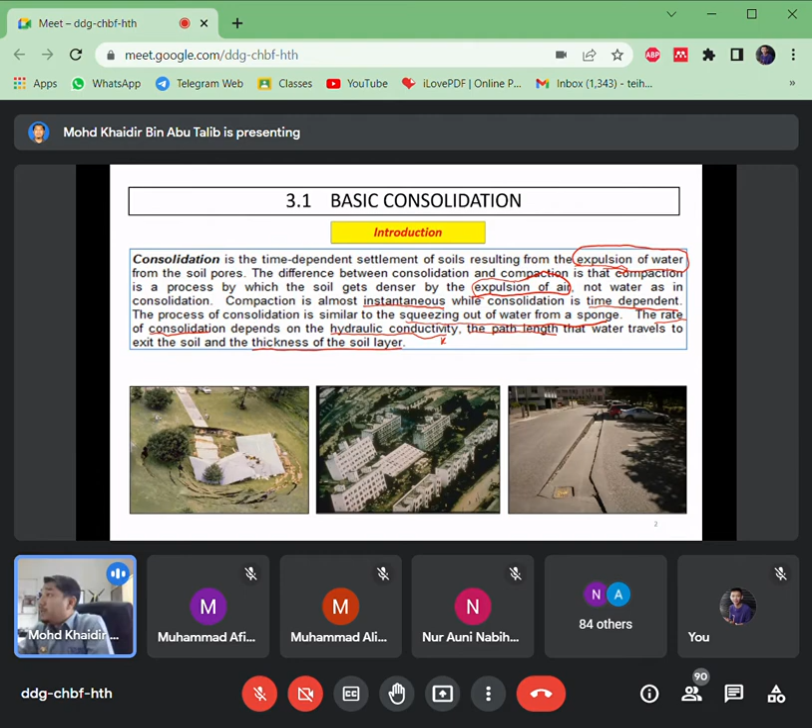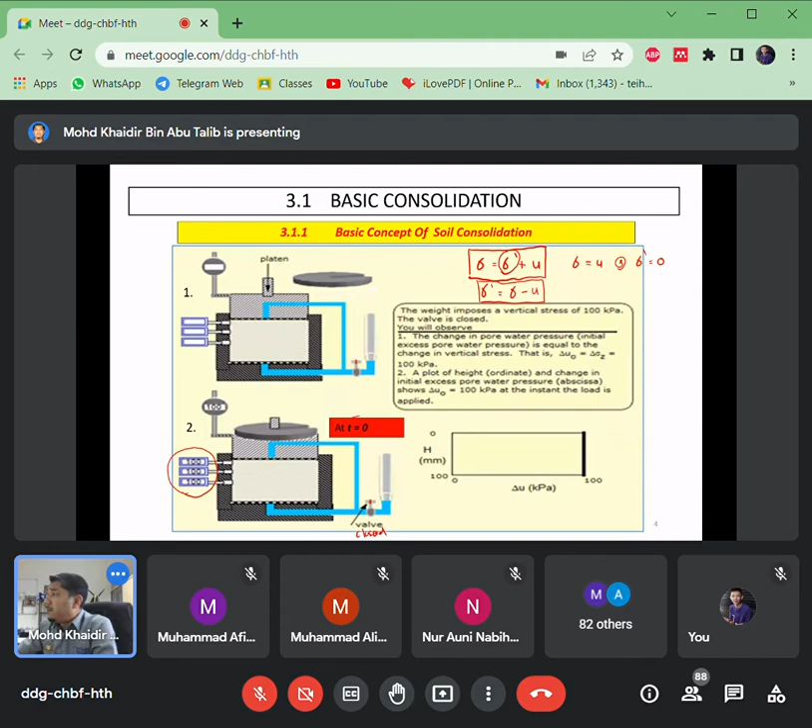Then we open the valve. Once the valve is open, let's say at T equal to 240 minutes, at certain times the water pressure would change due to the expulsion of water. So once it's open, water starts to be released and drains out. At that time the reading of the water pressure would be smaller than our vertical stress. Earlier at T equal to 0, U equals the vertical stress.

Kilopascal, which we get from the transducer at the middle of the clay layer. So going back to the formula: total effective stress equals total stress minus U. Therefore the effective stress equals 100, this being the vertical stress, minus U which is 54, giving us an effective stress equal to 46 kilopascal.

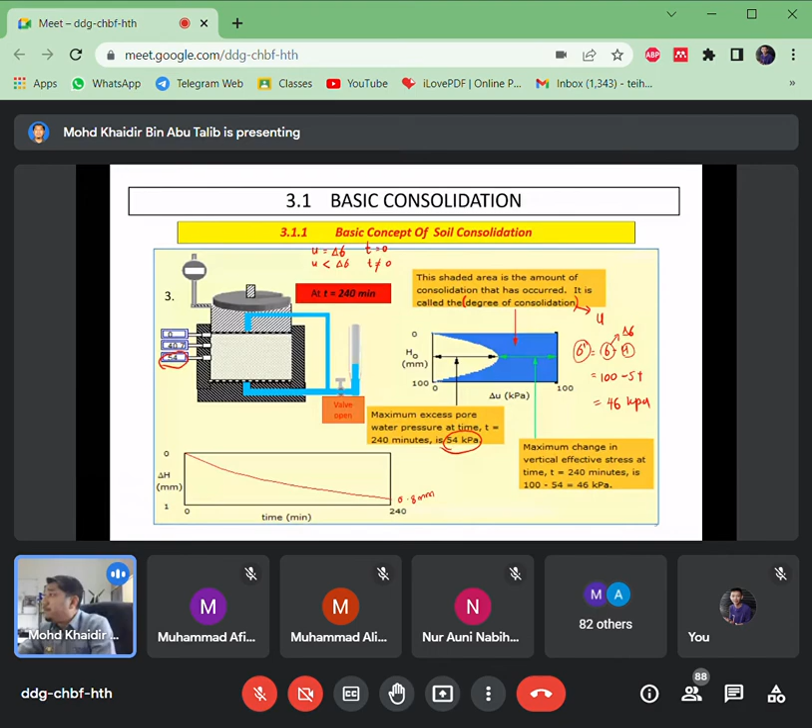So let's go back to this graph, which shows the change of thickness of the layer over time. As water comes out, settlement occurs. In this case it's about 0.8 mm after 240 minutes, or about 4 hours. So after 4 hours, the settlement is 0.8 mm, and the effective stress equals 46 kilopascal.

Okay, now we go to T equal to infinity. Infinity means when the pore water pressure is totally drained out — it's finished, the water is expelled. So at T equal to infinity, U equals 0. Once U equals 0, the effective stress equals the total stress, equal to 100 kilopascal.

So basically what we can see is the more it consolidates, the stronger the soil becomes. Now, as an engineer, the important part is whether the settlement is allowable in our design, and the next question is how long it will take for the settlement to occur for the allowable design settlement. If we know that, we can decide whether we need to improve the soil or find any solutions if that area has a problem — like in your project, once there's a problem, we move to solutions. If there's no problem, okay, no problem. But we need to know the time, the total settlement, and so on.

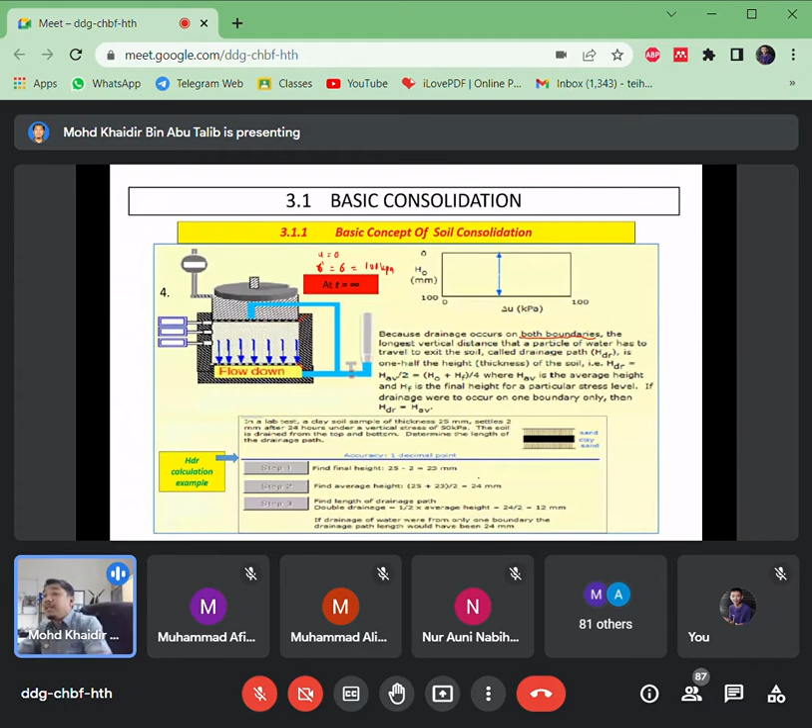This is a summary of the observations for the application of load at the valve close: T equal to 0, and valve is closed. U equal to the total stress, meaning 100 kilopascal.

At constant load with the valve open and T larger than 0, T cannot be negative, so T not 0 is in the positive integer line. The initial excess pore water pressure decreases and the vertical effective stress increases. So what happens is...

U by T will be smaller than the initial pore water pressure. Initially the pore pressure is 100, so by time it will decrease, and at this time the effective stress will have a value larger than zero, not zero. So effective stress equal to zero initially. When time approaches infinity, meaning all the water is drained out, the effective stress equals the total stress.

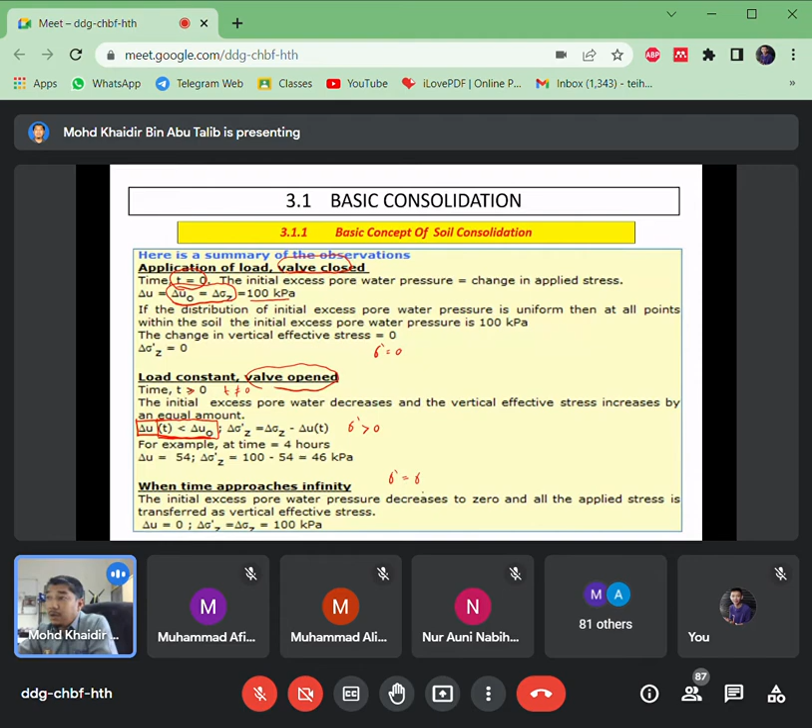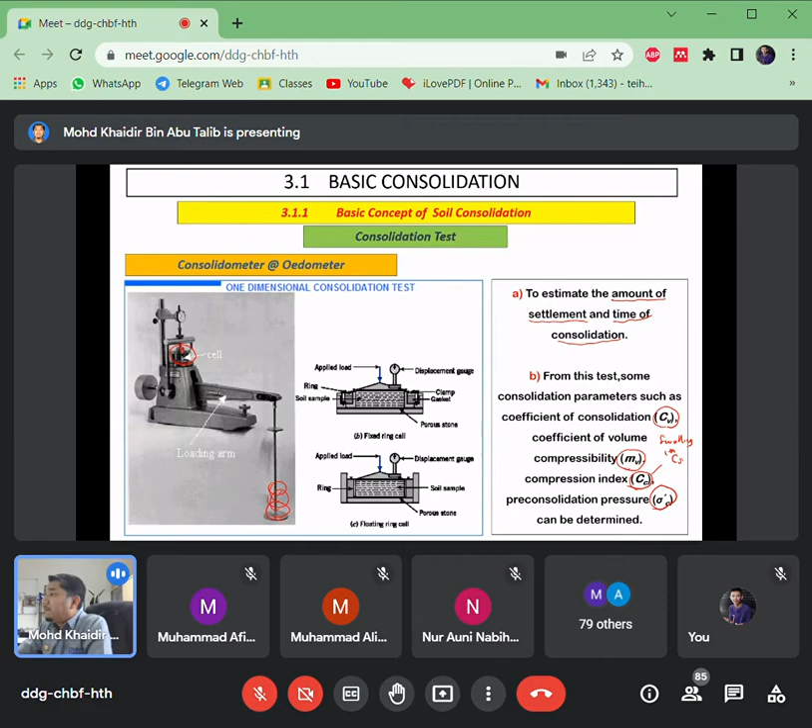At the regular time intervals, we need intervals of time. We can't just put any random time, sometimes a day, sometimes 2 days, 3 hours. It has its own timing, depending on the type of soil. Normally we take 24 hours, every 24 hours as one day. But for certain clays we can wait for each load about 2 to 3 days. 48 hours means 2 days. So some are 3 days, some are 4 days, some just 12 hours if the K value is large. So it depends.

The load is doubled with each increment up to the required maximum. So load is doubled means, let's say we start with 25 kilopascal, then 25 times 2 is 50, 50 times 2 is 100, 100 times 2 is 200. That means double of each increment.

The startup load is quite important. Why we choose 25, why we choose 20, why we choose 15. Similar to the time interval, it depends on the type of soil.

And during each load stage, thickness changes are recorded against time. So we have a table for this. By time, let's say in 24 hours we make certain intervals at 3 seconds, 6 seconds, 9 seconds, then 1 minute, 15 minutes, 1 hour, 5 hours, 12 hours and 24 hours, for example.

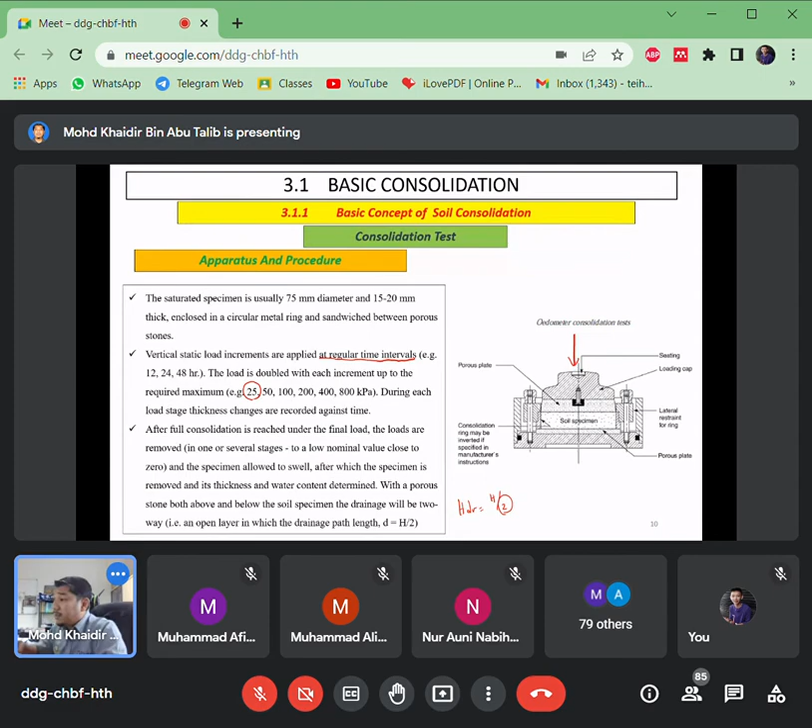In consolidation test, we have 3 main stages: stage 1 is initial compression, stage 2 is primary consolidation, and the third one is secondary consolidation. In many cases for clay, the more significant stage for consolidation is stage 2.

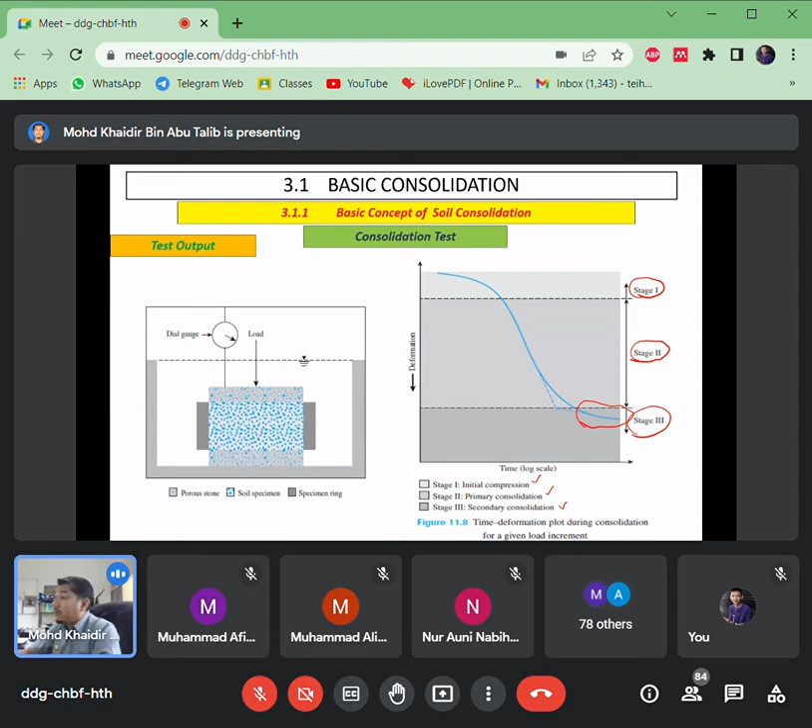So for the void ratio versus pressure. This is the first part to understand the consolidation process. Once we've done the lab and gotten the data, we want to analyze the data. So this is how we analyze the data. The first part we have to analyze is the void ratio-pressure plot, void ratio E versus pressure. Pressure is stress.

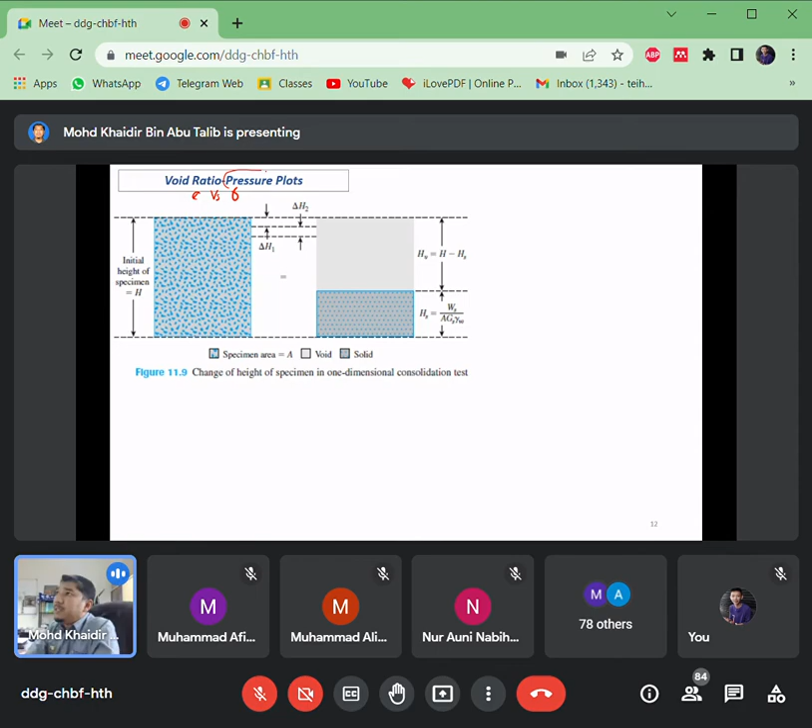Pressure plots should be in log scale. So E versus log sigma. Jadi ni.

This is the first part, the consolidation analysis. Let's say we have the initial height of specimen like this. Then after the change, or after we put the load - the first load, the second load - the change of the height, delta H1, the second load delta H2, the third load, and so on.

So the important part at the end of the settlement process or consolidation process, we have to know the solid height, the remain of the solid. So the void height is equal to the total height, initial height, minus the solid height, where the solid height equal to the weight of the soil divided by the area of the soil and the specific gravity of the soil and the unit weight of water.

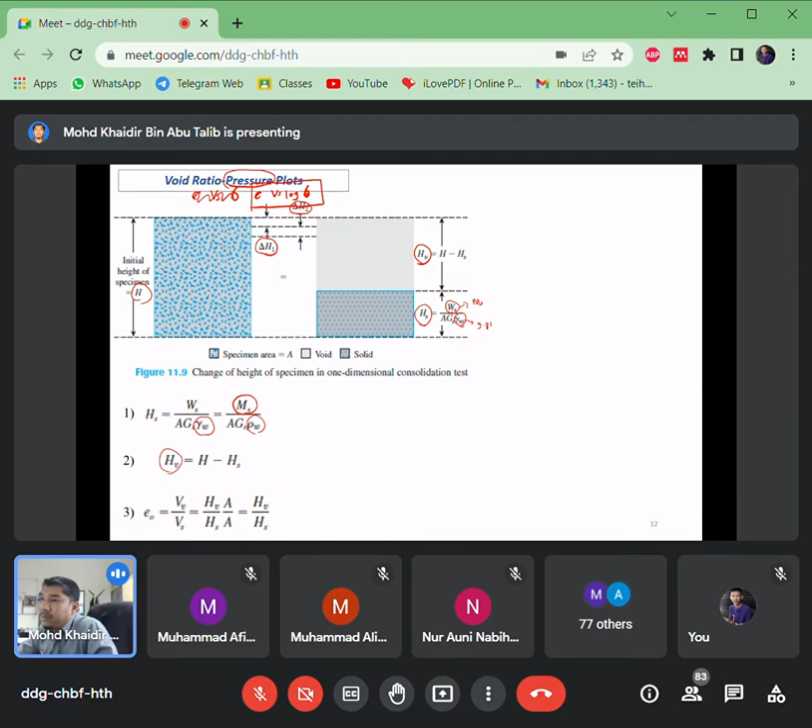We calculate the HV, the total height minus HS. Then we calculate the E. The E is equal to HV over HS. And then we fill the tables and plot the graph.

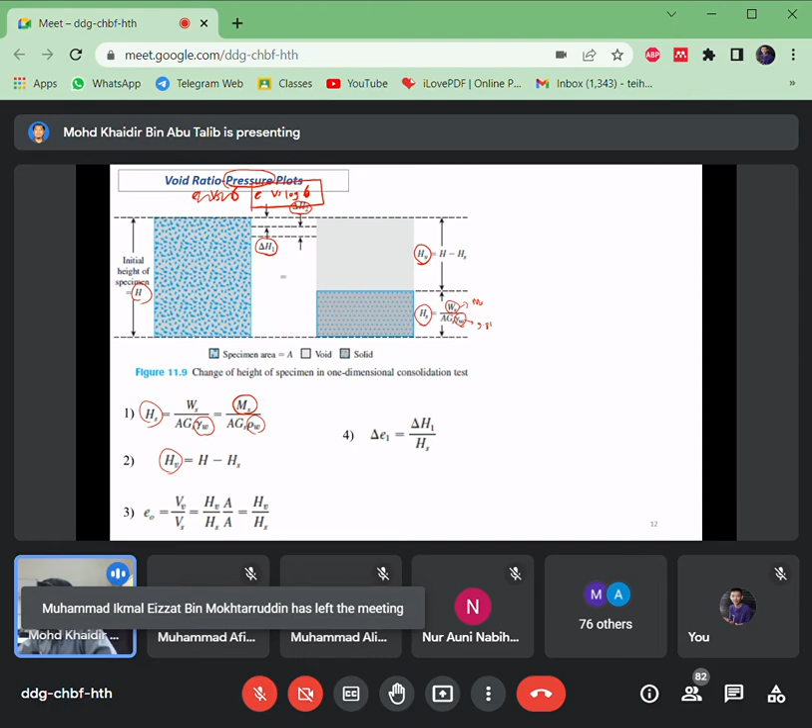And this is how the change of the void ratio over time. So this is an example - once we give, let's say, this is first load, second load, third load, fourth load, fifth load, as an example. So it will have the change of the void ratio due to the load, due to the pressure. So this is an example like this.

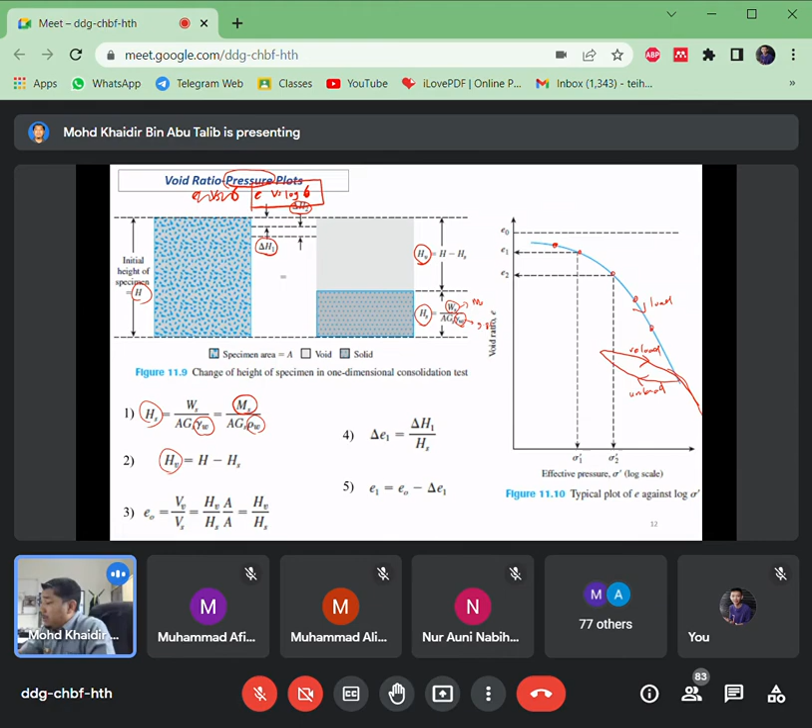Okay, this is typical graph for void ratio pressure plot. This is important - every time we do an oedometer test, we have to come up with this graph. From this graph, many parameters we can get. So it's important for us to understand how to analyze the data.

So let's say we have the data like this. Following are the results of the laboratory consolidation test on the soil specimen obtained from the field. Dry mass of specimen 128 gram, so we have MS here. Height of specimen at the beginning of the test means the H equal to 2.54 cm. Then GS we have 2.75, and the area of the specimen or A equal to 30.68 centimeter square.

Let's say we put the effective pressure from 0 to 50 to 100 kilopascal, and this is the reading of the gauge, the dial gauge that we placed on our test. So 254 at the initial, at 0 same as initial. And then it changes by time. This is the data that we get from the lab test.

So how do we start to draw E versus log sigma prime? Okay.

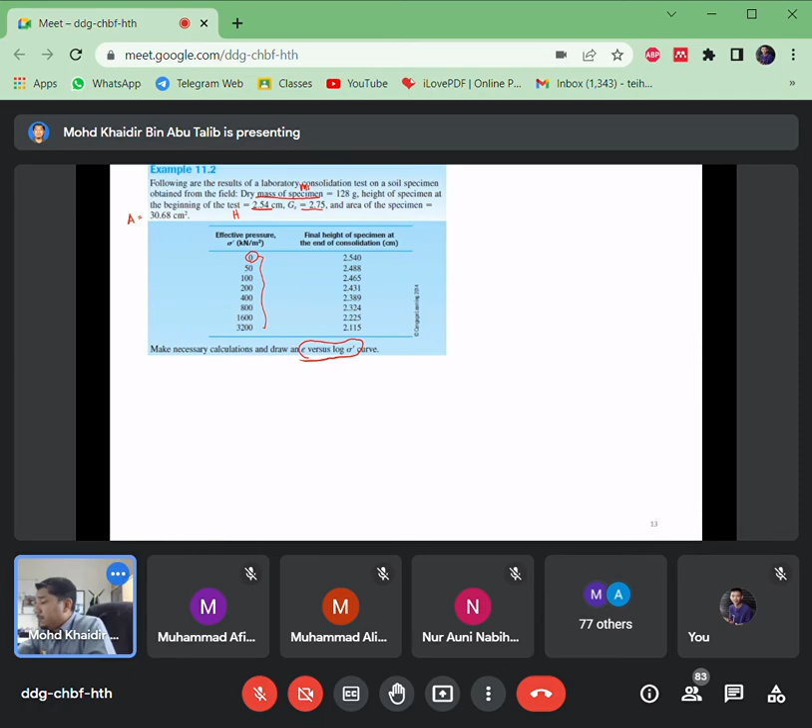So first step, we calculate the solid height equal to MS over A, GS, rho W. We have MS 128 gram and the A 30.68, times GS 2.75 and rho W equal to 1 gram over centimeter cube. Because it's in grams, so we have to work in grams. This one is in centimeters, so we have to work in centimeters. If you want to work in kilograms, you have to change the units above - multiply by 1000. It's up to you, that's about unit - unit is important, unit is important.

So we get the height of solid is 1.52 cm. This is height of solid. So we make a table. Effective pressure - your book uses ton per feet square instead. Actually it's the same, actually it's the same.

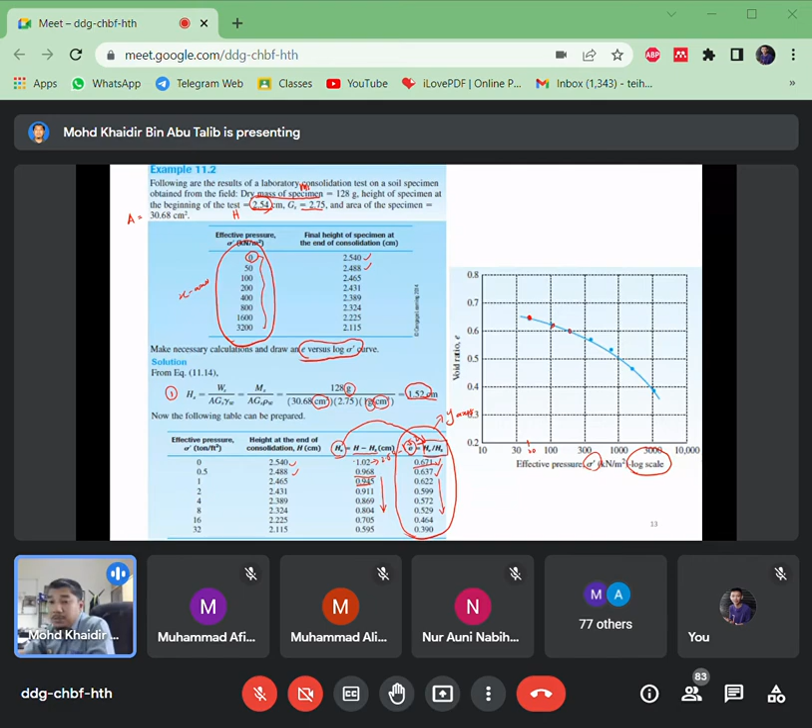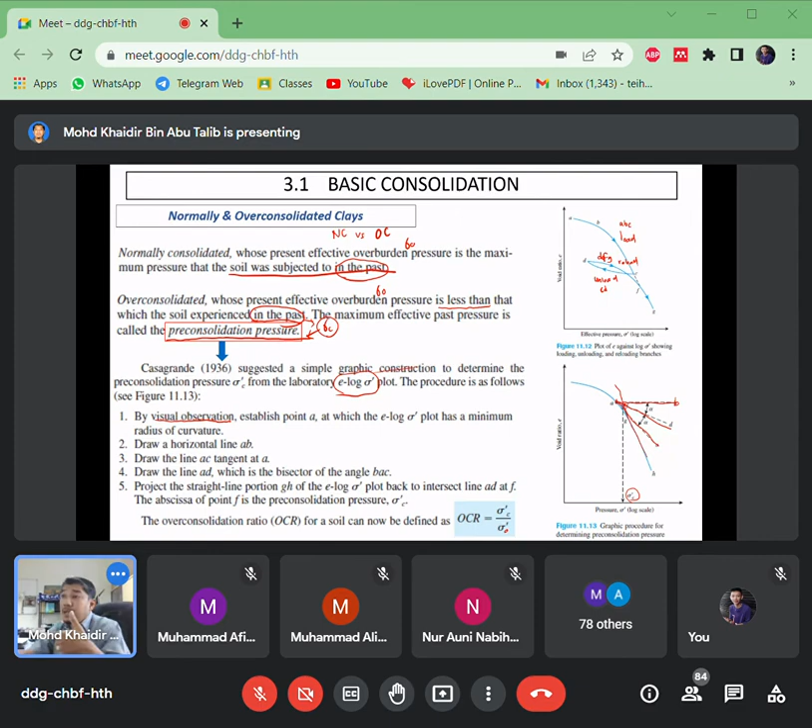Okay, so first part adalah once kita dapat raw data from lab test, kita analyze into a graph E log sigma prime. Then from E log sigma prime, we can obtain the sigma C guna Casagrande method. And sekarang ni kita tengok from E log sigma prime, apa lagi yang kita boleh dapat. So the first, we can get CC, compression index, and CS, swelling index, and also the volume of compressibility, MV. CC, CS, MV, dan sigma C kita boleh dapat.

So how we calculate the CC? CC basically is the gradient of the load part. Okay, ini load part kan? Load part, gradient dia, dia punya kecerunan. So kecerunan of the load part adalah CC.

Sekarang ni kita tengok pula for unload part kat sini. Ni unload part, unload part ni kita boleh dapat CS. Jadi unload part punya gradient adalah CS. Jadi CS sama juga macam CC, tapi adalah pada bahagian unload, at the unload part.

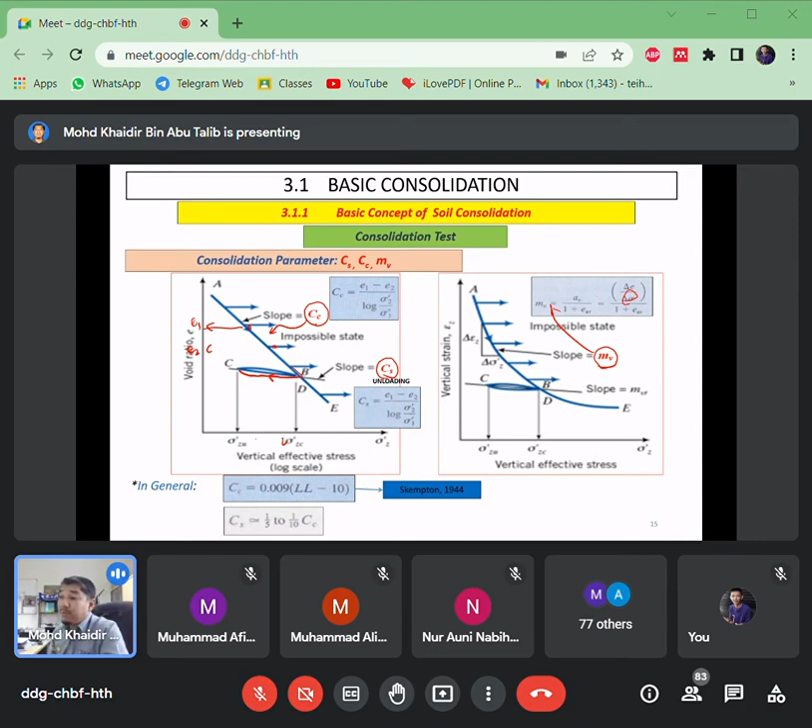Okay, let's look at these examples. This example is already calculated. Supposedly you need to find HS, HV, HF, and then you get E. That's the steps.

And calculate the compression index ratio, meaning CS over CC. So we have to find out the CC and CS, the gradient from the loading part and gradient from the unloading part for the CS, and on that basis calculate the void ratio.

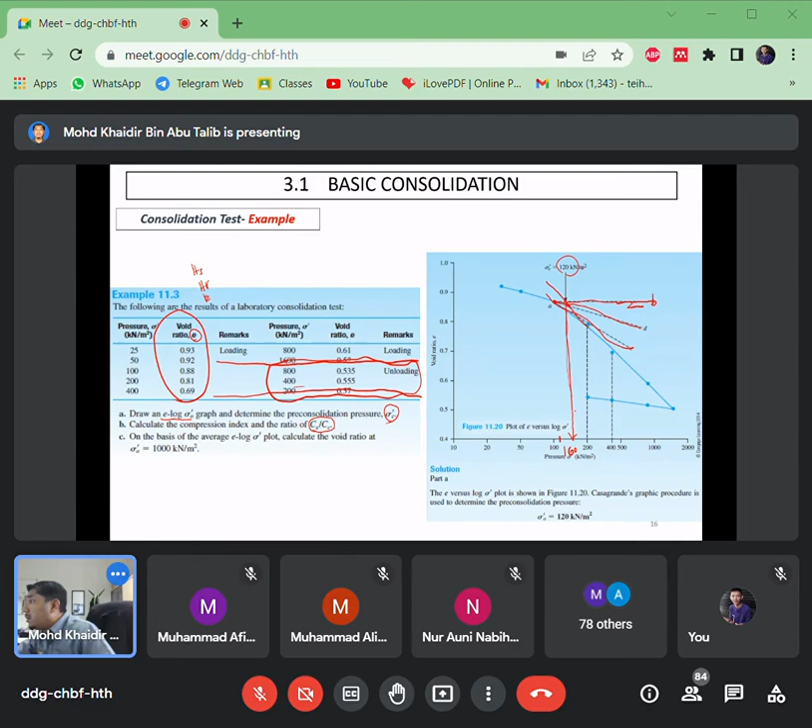Okay, from this graph, for part B, calculate CS and CC. So let's say we get E 0.8 and 0.7 at this point, at load 200 and 400.

So this is the loading part, we take this as the gradient, CC. This other one is the gradient for CS. So for CC: 0.8 minus 0.7, change of void ratio over log sigma 2 over sigma 1, 400 over 200, we get 0.33. And from the unloading branch...

gradient for CS, same thing, we take this value and calculate CS, getting CS 0.04. But if we want the ratio, it's 0.04 over 0.33, and we get 0.12. So this is the important part - we got sigma C 120, CC 0.33, CS 0.04, so the ratio is about 0.12.

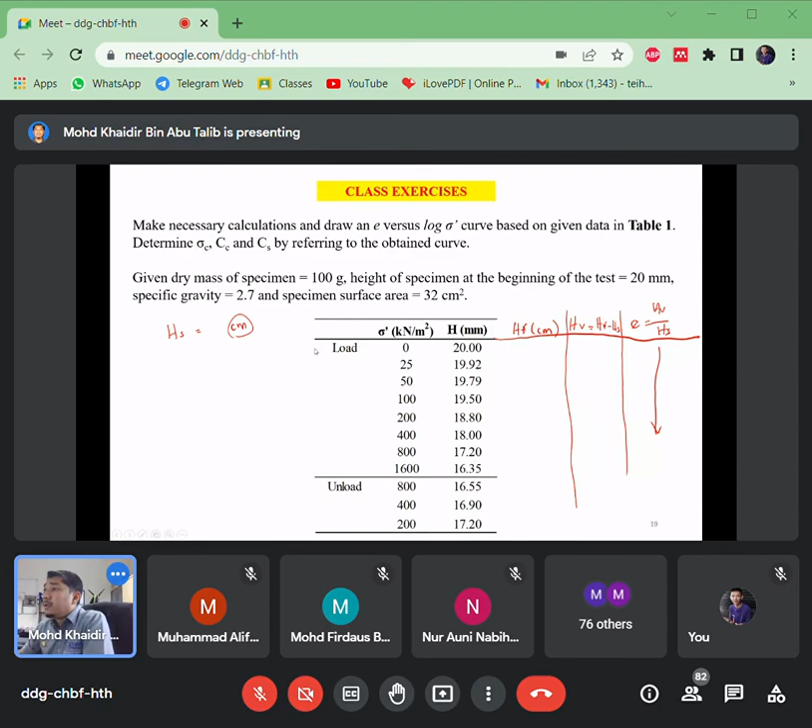So E equals HV over HS. If you got a different answer, let me know. So this is the E, and after we plot, we get this kind of graph. So from this graph, we need to determine sigma C, determine CC, determine CS. So how do we find sigma C?

First of all, we make point A, then make straight line AB, then we make the tangent of A, then we make the bisector - AC, bisector of BAC we get AD, then we make the straight line of this point.

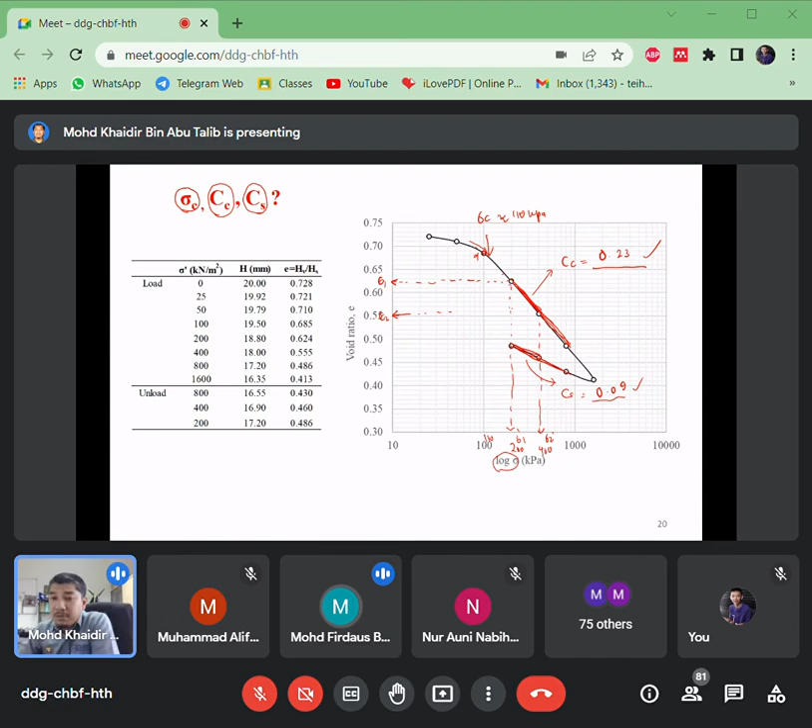Yang kita nak point A tu memang titik ketiga? Macam mana yang point A tu memang kena titik ketiga? Bukan mesti kena titik ketiga, yang tadi lah ikut rules dia. Dia minimum curvature, minimum curvature tu bermaksud dia macam antara initial dengan primary consolidation, based on yang kita punya contoh tadi. So nanti Firdaus cuba tengok balik Casagrande punya steps tadi.

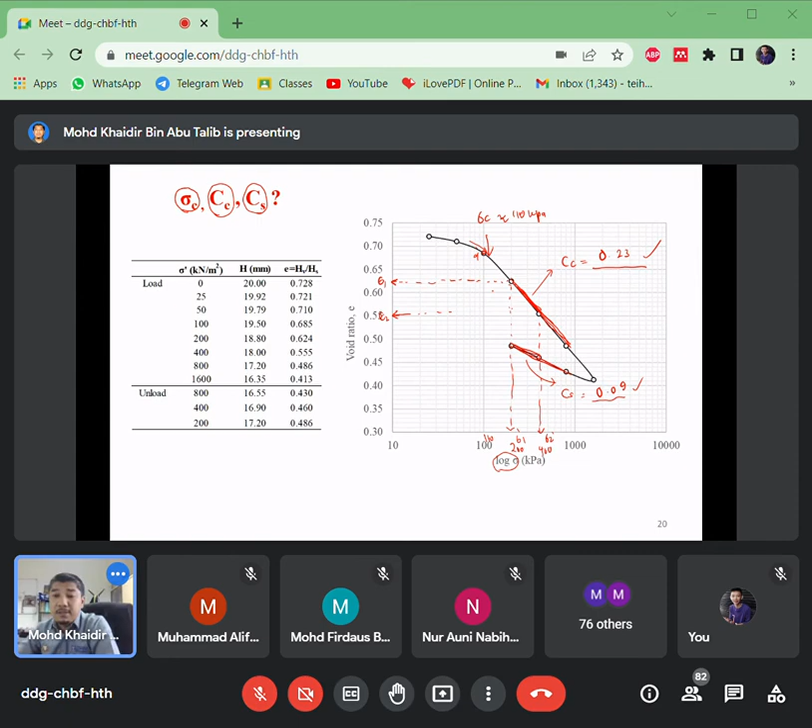Okay, ada lain soalan untuk yang kat sini, sebelum kita pergi yang seterusnya? Alright, kalau okay kita teruskan. Jadi

kita pergi kepada Terzaghi theory in consolidation test. Jadi Terzaghi theory ini, nama pun teori, so dia complicated sikit lah kalau saya terangkan dalam bentuk yang complicated. Tapi the mission of the Terzaghi theory is basically to estimate from the lab test, kita nak estimate for the field test real outcomes. Jadi kita sampling, we do a test in our lab, then we can predict the field outcomes. Jadi kita daripada lab tu kita boleh convert into field test punya data.

Itu adalah mission of the Terzaghi theory. Jadi dia based on, dia panggil sebagai coefficient of consolidation, CV, and also TV, time factor. So two things dalam Terzaghi theory. Jadi biasalah sebagai engineer yang lebih kita concern adalah berapa lama yang kita perlukan untuk this soils undergo the settlement, and the other thing is how much it would be settled. Bila how much dia punya soalan, seberapa banyak, kita kena tengok dari segi dia punya rate of consolidation and also dia punya settlement. Jadi itu adalah benda yang penting untuk kita faham supaya kita dapat estimate the overall settlement on any soil at any time.

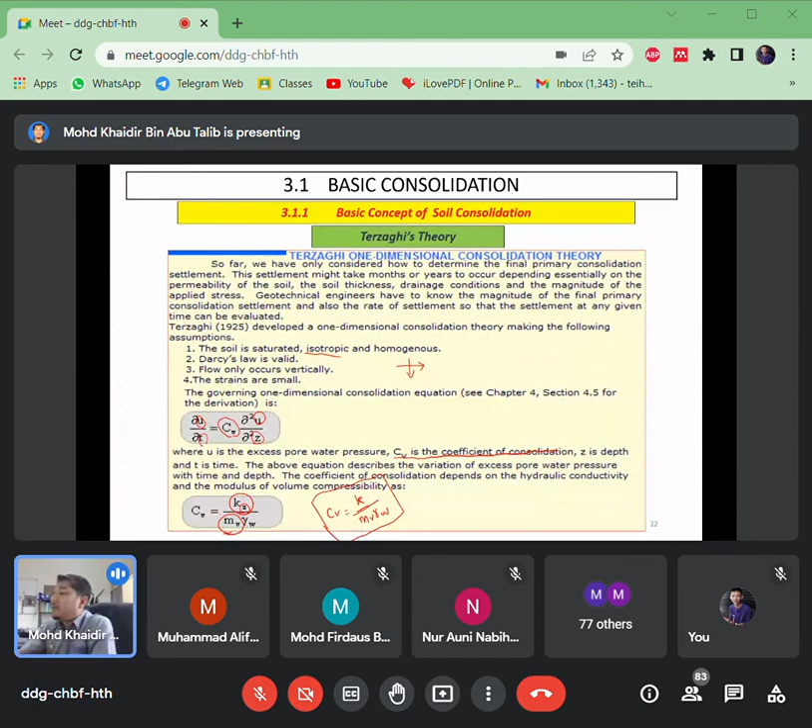In practice, geotechnical engineers are more concerned with the average degree of the consolidation. Degree of consolidation - tadi part of the factor that will give impact to settlement is the degree of consolidation, and I said the parameter is capital U. So this is degree of the consolidation, U.

Delta U T, at any T, is the average excess pore water pressure at a given time in the soil layer, and delta U naught is the initial excess pore water pressure.

For the uniform distribution of excess pore water pressure, we look at double drainage. This is the formula before it's simplified into the time factor TV equal to CVT. CV is the coefficient of consolidation from the previous part. T is the time required for settlement, and HDR is the drainage path.

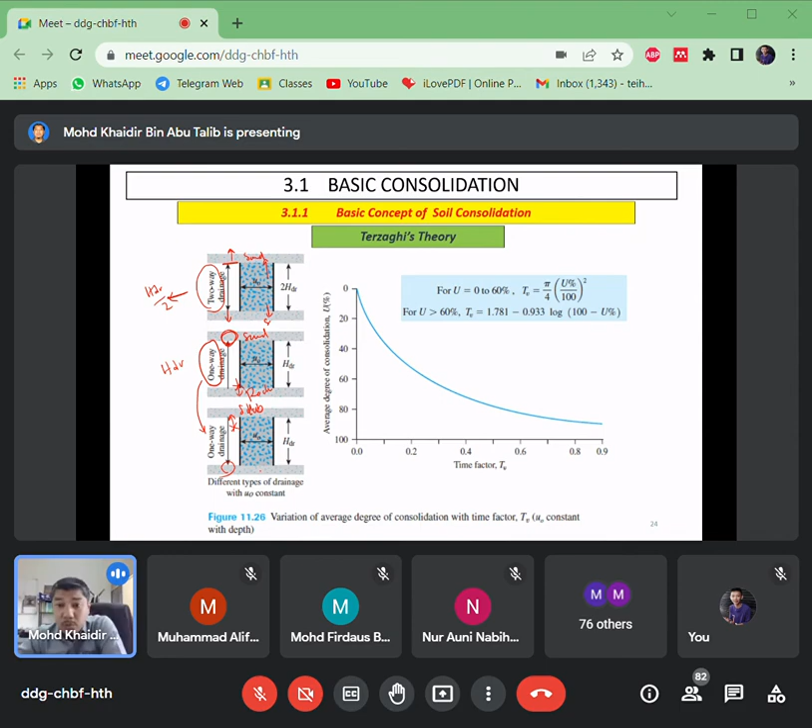So the time factor provides a useful expression to estimate settlement in the field from laboratory results. As mentioned, for Terzaghi theory the main purpose is to estimate field outcomes from lab tests, provided the two layers are the same clay and have the same degree of consolidation.

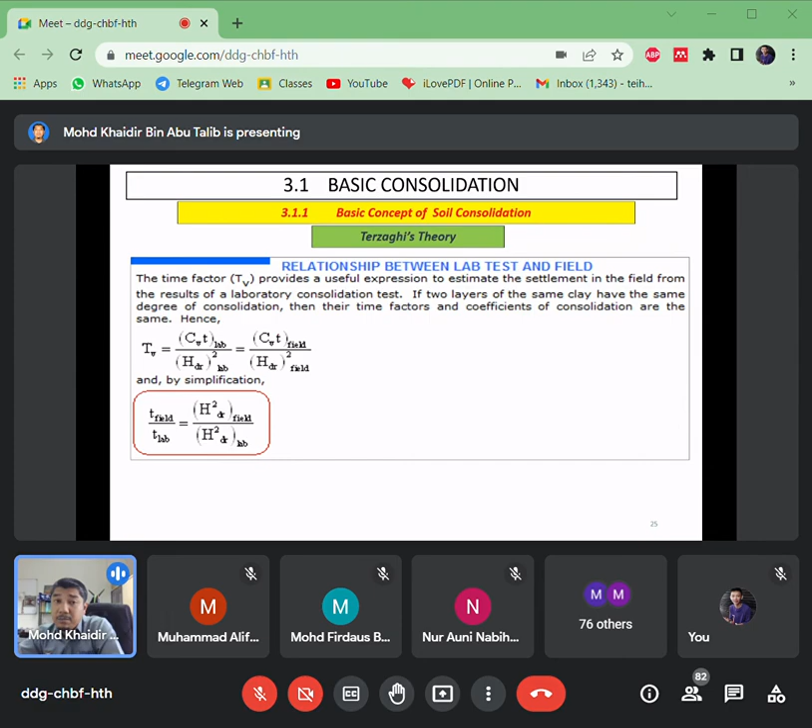So the CV is the same. Once CV is the same, we can predict from the laboratory test to the field test.

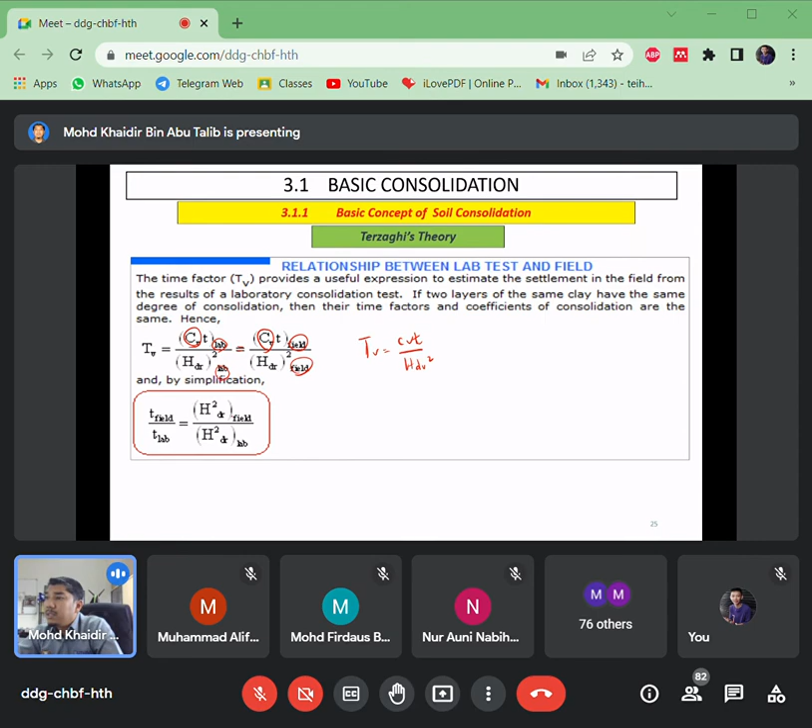The basic formula is TV equal to CVT over HDR squared, for lab and for field, equal. Once CV is the same, since the two layers are the same clay, CV equals CV, we simplify and cancel CV, giving T field over T lab equal to HDR field over HDR lab squared, cross-multiplying.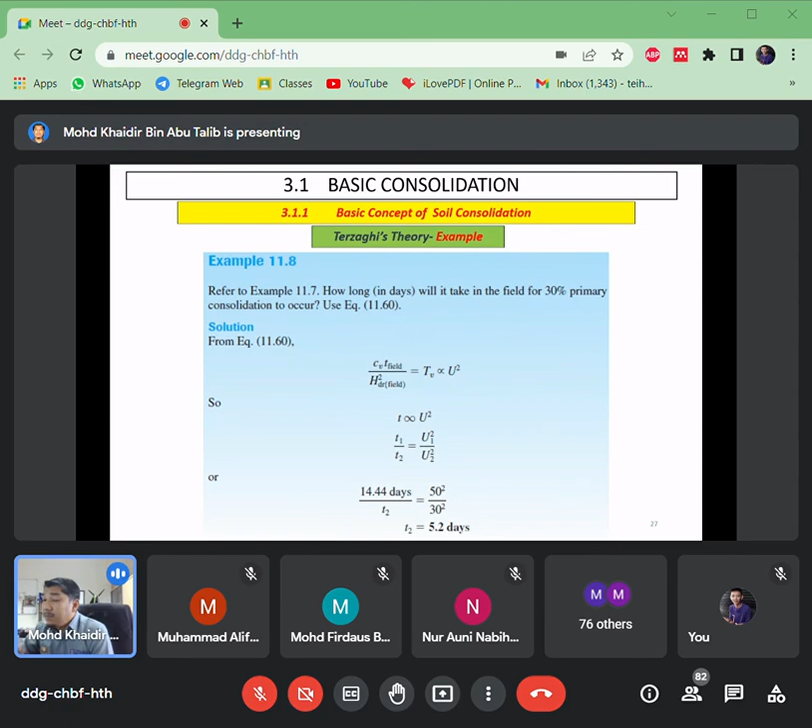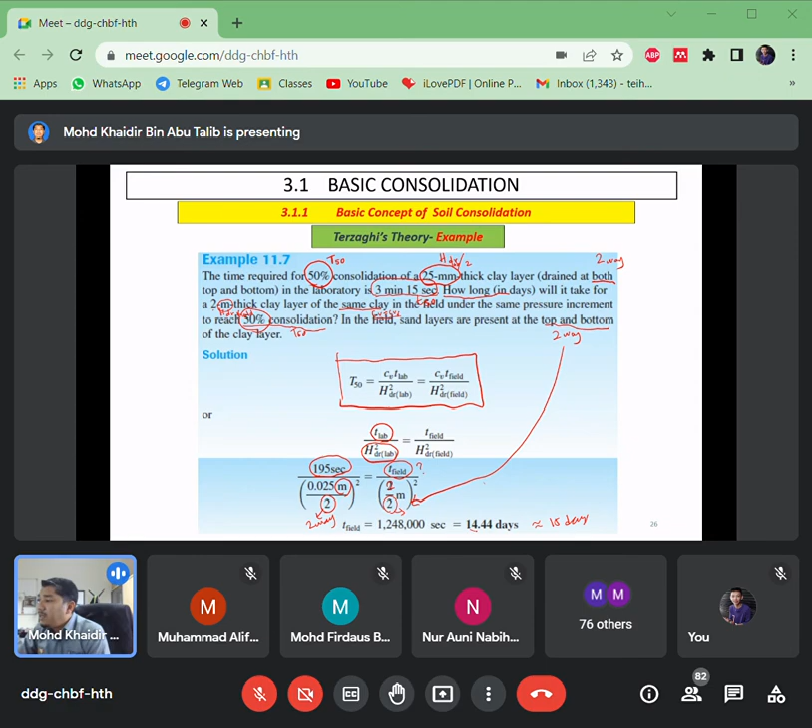How long in days will it take in the field for 30%? Ini sebenarnya proportion je. For 50% of consolidation is 14.44 days, so how about 30% of degree of consolidation? Jadi 14.44 equal to 50 U square. Now we want to know the T2 at 30% of degree consolidation. Jadi kita buat proportion dan we get T2 equal to 5.2 days.

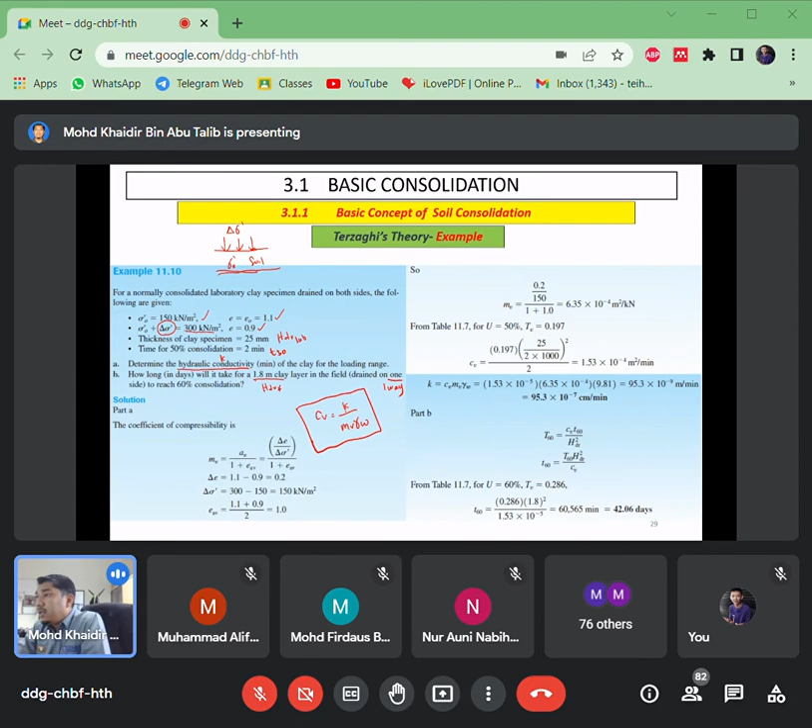Jadi soalan dia ialah determine the hydraulic conductivity K. Bila nak cari K, kita balik semula formula asas Terzaghi teori: CV equal to K over MV gamma W. Ini yang basic question, so yang kita nak tahu ialah K.

So K equal to CV MV gamma W. Dari soalan ni, unknown adalah CV dan MV, jadi kena cari dua-dua. Macam mana nak cari CV? Kita balik semula kepada formula asas TV equal to CVT over HDR square. Ini yang asas, hopefully you can remember these two basic equations for Terzaghi teori: CV equal to K over MV gamma W, dan TV equal to CVT over HDR square.

Jadi bila kita nak tahu CV, kita bawa keluar CV. So CV equal to TV HDR square over T. Dari dua basic equation ni kita boleh dapatkan CV dan juga boleh dapatkan MV. Kita katakan kita kira CV dulu. Dalam example dia calculate MV first, tapi dalam ni kita nak CV dulu.

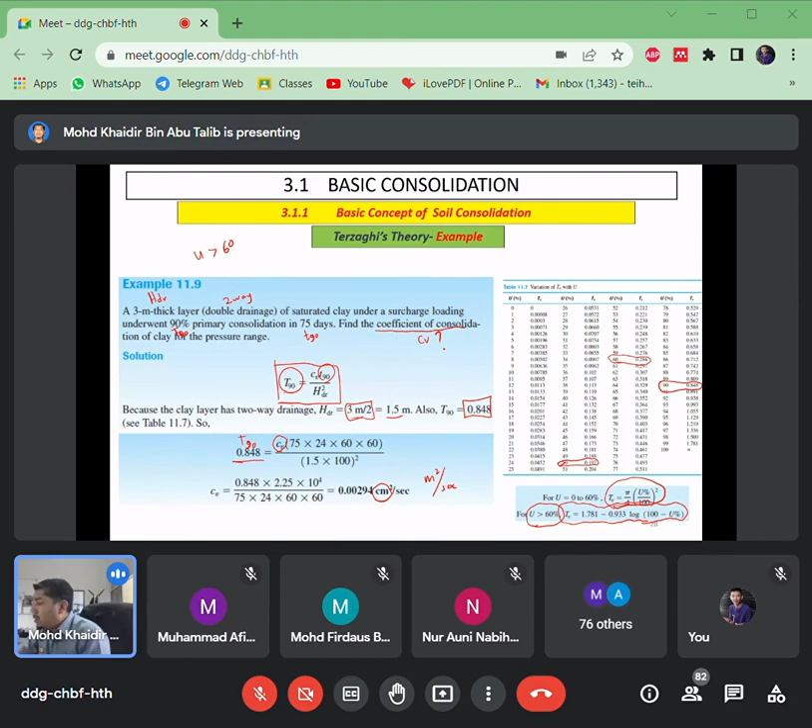Jadi kita masukkan, dia nak how long in days, jadi kita nak tahu T60 ni. HDR field, tak payah bagi dua, no need to divide by two because of one way direction, dibahagi dengan CV. CV kita guna CV yang sama daripada previous calculations since it's the same clay. Jadi kita dapat T60 equal to 42 days.